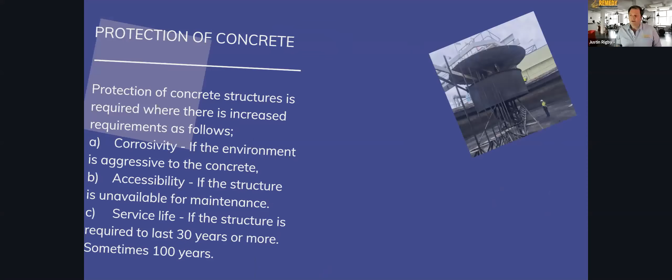So protection of concrete. Concrete on its own often survives quite well. When we're talking about protection of concrete, we're thinking about either applying a barrier on the outside, so waterproofing, protective coatings, or managing the corrosion of the reinforcing steel through corrosion inhibitors and cathodic protection. But not all concrete needs that, right? When we're talking about those strategies, we're looking at a high corrosivity zone. Maybe it's coastal, or maybe it's exposed to chemicals, or something that is not going to be accessed easily again. So when cracks develop or spalling occurs, you can't deal with it.

So instead, the designer should make sure that there's that higher level of protection to begin with. So there's less chance of cracking, less chance of spalling, or for an increased service life, whereby the structure's intended to last more than 30 years. If you want something to last 50 years, 100 years, you need to start looking at these additional layers of protection. So that's just a focus on where we're at in heavy industry, really.

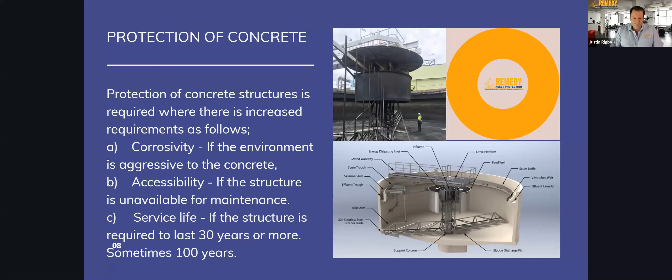And if I take you to some extreme examples, could you imagine trying to protect concrete in the nuclear industry? In a nuclear reactor, you have wastewater, and the whole reactor is encased in concrete. It needs to be resistant to radioactivity. That's the thing that wants to break down organic molecules. It also needs to be chemically resistant.

So if you own a nuclear reactor, if you want to sleep at night, you're going to make sure that thing's done right. You're going to have clear specifications. You're going to pre-qualify your contractors. When the work's taking place, you're going to make sure someone's there to inspect it. And you want all the documentation to make sure that there's a paper trail saying everything was done right. You're not going to wait for a defect to occur and rely on a warranty, right? You're going to get it right the first time.

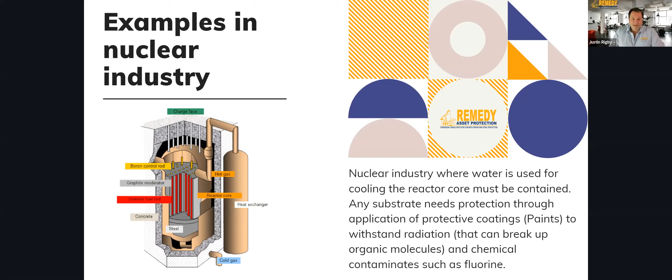Another example could be seen in the mining industry, for instance, with their wastewater. Their wastewater is contaminated with heavy metals and strong acidity. And perhaps in a tailings dam, they may have a clay base with a liner, but on the dam wall, it may be a concrete wall. So the concrete needs to be protected from the contents of the dam, from the aggressive environment. So again, linings and impregnations and mixtures and things like that need to be applied to protect that concrete.

Because we've seen around the world tailings dam failures where the dam wall breaks and it's flooded townships, it's wiped out townships. So these are the extreme examples whereby if you want to sleep at night, you've got to make sure you get everything right. And so that's where these durability lessons in heavy industries come from.

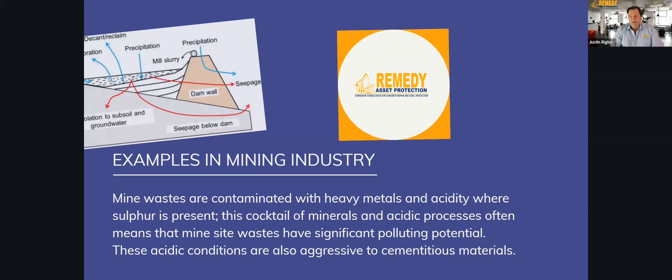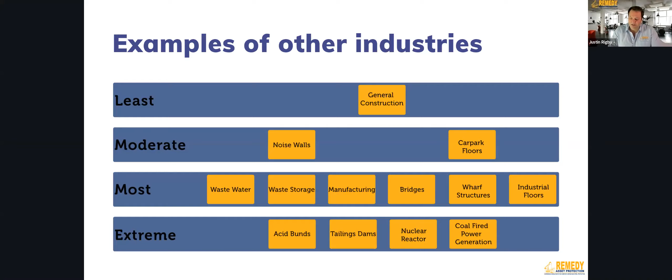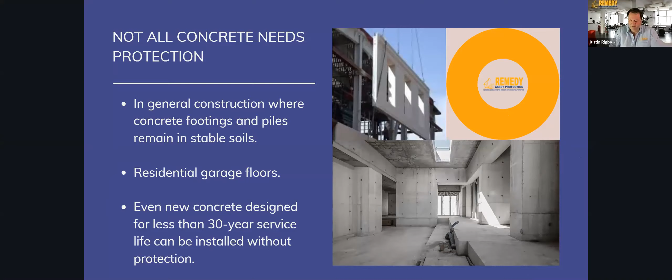So we know not all concrete needs protection. For example, here in the image, the prefab concrete panels that are being installed on a commercial building, they just need decoration. They don't need protection. The image below, my new mansion on the beach at Byron Bay, that doesn't need protection. It needs decoration. Anything that's designed for less than 30 years durability, concrete will stand up quite well unless it's a seriously aggressive environment.

But if we're bringing our focus from the heavy industry back towards civic infrastructure and even commercial construction, we're thinking about atmospheric exposure of concrete. So not the tailings dam, not the nuclear reactor, but more bridges and structures and wharves and piers and things like that. So in those structures, the major degradation mechanism is usually carbonation or salt ingress.

Now, carbonation is the process of concrete reacting with atmospheric carbon dioxide. The concrete starts at a high pH value, which is very alkaline, and then over a period of years and decades, it slowly loses its alkalinity. The pH drops, and when it drops down towards 9, somewhere around there, the steel is not passivating itself. The steel will protect itself in highly alkaline concrete. But when we lose that alkalinity, the steel loses its passivating layer. The concrete's fine. It loves it. It's the steel that doesn't like it, and it starts corroding. And that's one of the major issues we deal with.

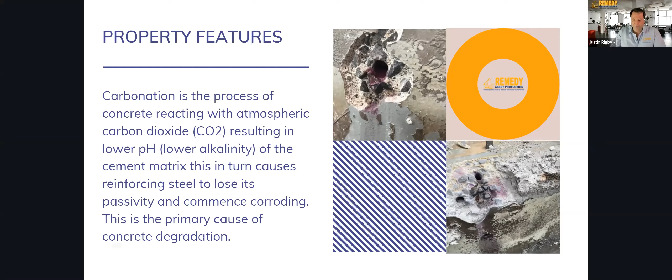Coupled with that is where salt can migrate through the concrete and find its way towards the steel. And whether the concrete's high pH or if it's carbonated, it doesn't matter. The salt will still interrupt that passivating layer and cause corrosion in alkaline concrete. If the salt migrates at the same speed as carbonation, it just means when they both get there, it's going to be very aggressive corrosion.

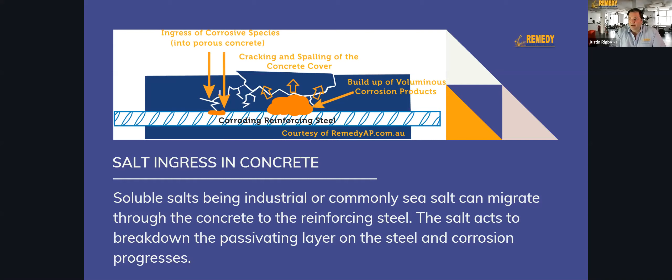So in dealing with carbonation and salt ingress, there's a range of different methods that can be employed to protect the concrete. And that includes, at the design phase, including concrete admixtures in the mix. Cathodic protection can be applied, but usually in the early years of a structure, if the designer puts some tags and probes in there, you don't need cathodic protection, but the tags and probes enable you to monitor corrosion of the steel. And then down the track, when you need to apply corrosion protection, you know when it's due, whether that be in 5 years, 10 years, or maybe 15 years, you can start applying cathodic protection to make the structure last longer.

Corrosion inhibitors can be applied within the admixture, but also later through migrating corrosion inhibitors. So it's a solution you put on the surface and it migrates through the concrete. And we can also use cementitious polymers to waterproof the surface. So they provide a barrier on the surface. So do our polymer coatings, such as epoxies and polyureas, provide a barrier to separate the contaminants from the concrete.

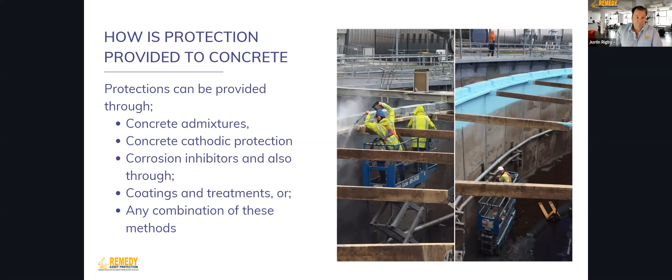So each of those strategies, when maybe just focusing on providing the barrier with the waterproofing or the polymer coatings, that can also be used to stop carbonation in concrete. It seals the surface off from the air.

So it is a relatively basic process, but it still benefits from quality control. The problem when we say something's basic or something's simple, all of a sudden nobody pays it any attention. And that's the problem. And an anti-carbonation coating is important. So even though it's relatively easy to apply, it's important. So it can benefit from external quality control. And it doesn't need to be expensive. It doesn't need to be a lot of work.

It just needs to be making sure that the surface preparation is done properly, that the primer is applied, and then the coating is applied to a proper thickness and has proper film forming characteristics to last 10, 20, 30 years. So just a couple of inspection steps on the inspection test plan helps make sure that that process is taken care of properly. Same as your migrating corrosion inhibitors, and it's like silane treatments.

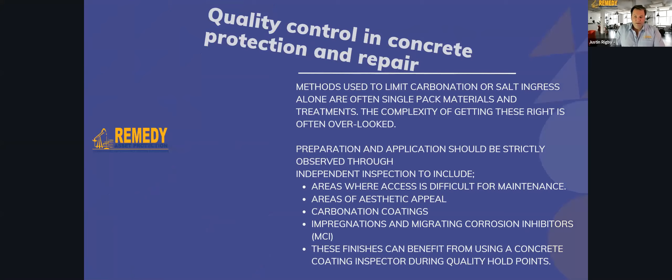Using these materials, it's all about the corrosion inhibitor migrating towards the steel. If you don't put enough stuff on, it doesn't get there, or there's not enough of it. So that needs, again, relatively simple process, but it's so important. It requires an external level of quality control. Just a couple of simple steps on the inspection test plan can take care of that.

Just a word on product data sheets, and I'll also talk about warranties, because these tend to be a couple of things that people trip up on. Product data sheets are written with good intentions of the manufacturers, but they're a generic document that try to describe the whole range of concrete protection, you know, from the residential decorative level through to commercial construction, right through to aggressive environments. And they're trying to communicate to that whole range of industry.

So the information that's in a product data sheet, consider it base level, and it's really something you need the experience of the product manufacturer to provide further information, and then also consultants to build specifications around that.

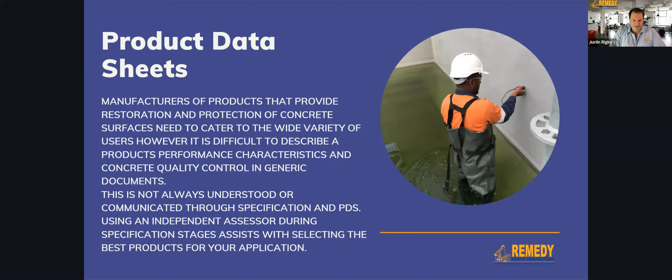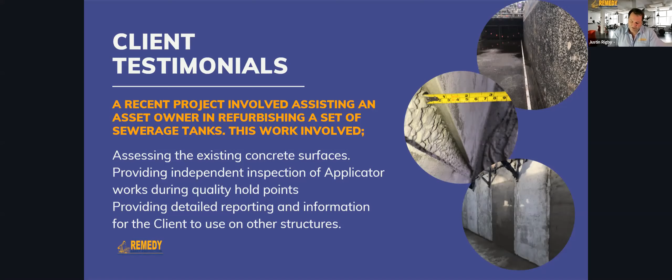And the image at the bottom is where, once they've completed all the panels, they've stitched them all up, and they've closed up that gap where the battens are. There is an image in a later slide that shows the finished wall surface after waterproofing, but I'll just focus on this example for a moment and describe that the benefits of quality control are obvious to the owner.

I mean, they get somebody that's experienced in concrete repair and coatings, that is focusing on their job, and somebody that's independent that can give an independent opinion of different things. So the purpose of this whole thing is to increase durability, right?

You don't want to keep going back into that tank, and you don't want the mortar to fall off to begin with, but even if it almost worked and it lasts 10 years instead of 20 years, that's still a problem. You don't want to go back there in 10 years. You want it to last as long as possible.

So by having independent quality control, that means that each step of the process is managed and doesn't pass until it meets the requirement. Another advantage, or an extended advantage of that, is that studies show 15 to 35% of the cost of corrosion can be saved through gaining better durability. And that doesn't mean new technologies or things that aren't invented yet. That means that with everything we have today, if we just do things better, you can save 15 to 35% of the cost of corrosion. You could probably consider that is a fair portion of a maintenance budget, really.

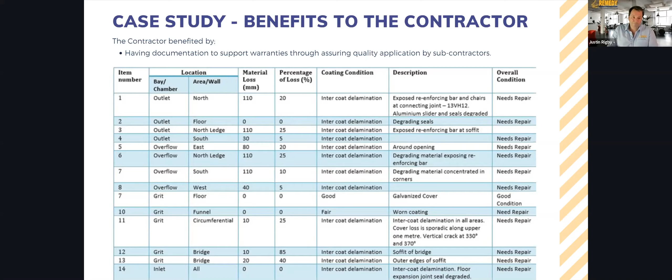For suppliers, material suppliers, when projects don't go so well and something fails, obviously the contractor gets it, but also the product gets blamed as well. People say, oh, well, that product fell off, but it's not always a materials problem. Sometimes it's an application problem. But if something goes wrong, everyone starts to smell a little bit. So for suppliers, knowing that there's an independent person there gives them more assurance that their products are being applied properly and that they're going to get great results.

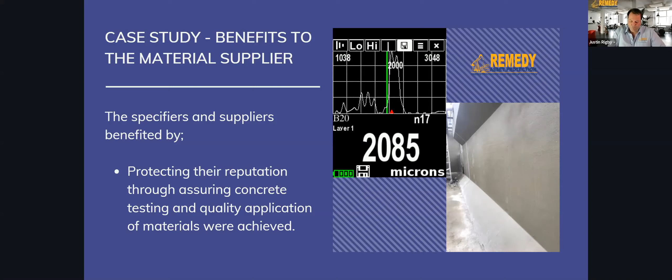For the applicator, the subcontractor, they also benefit. Quite often we go onto a new job and the applicator's like, oh, wow, what's this? These people are going to watch over my shoulder. They're going to check my work, and they're a little apprehensive. But within the first couple of days, every job we're on, the applicator soon realizes that we're of benefit to them. They've got somebody that's experienced on many different projects observing what they do. And the intention is that if something's going astray, it gets picked up early.

Applicators love it. They save time and money; when they identify issues late, that's when they have real cost problems. Then also, knowing that somebody is documenting and recording the project, for a project that's going well, the report is a glowing endorsement of that job. So that also helps protect them from warranty claims. Then there's some images of some different jobs we're on, witnessing mortar application, as well as testing concrete and concrete coatings.

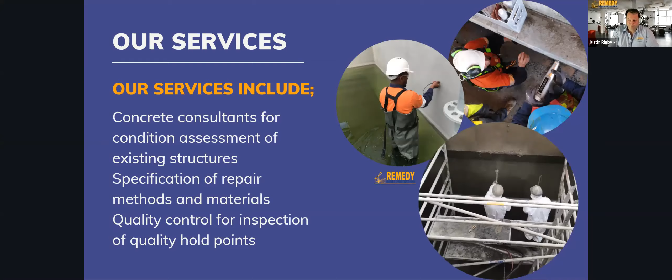And I'd just like to leave you with a last few thoughts on how to succeed on concrete jobs, whether it's protection or repair: don't rely on warranties. If you're a project manager and you need to claim on a warranty, it means you didn't manage quality control properly, and often you'll never get back to fix it right. By that stage, the asset's already been put into service. Maybe they're not going to shut the asset down and give you proper access. So you need to use secondary repair methods that are always a compromise on the original level of quality.

You may have disputes where the contractor says, well, it's not my fault, it's the material's fault, or the material guy says it's not their fault, something else went wrong. So maybe you can't claim on your warranty. Nobody fixes it. So don't rely on warranties. Manage the quality control early, and use a couple of these key strategies throughout the project, and you're going to have the job you need.

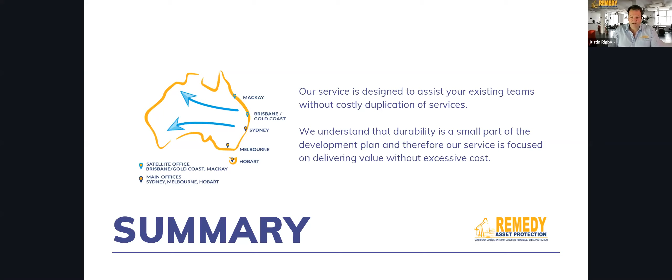Kieran: Thanks, Justin. Yeah, we've had a couple of questions come in during the talk. One of the earlier ones was, when we consider mass concrete is a highly durable product, if we think about historical structures and Roman structures being built 2,000 years old. If we can get rid of the steel inside the concrete, it'll probably make everyone's life a little bit easier. So the question was about, what's been your experience with the take up of polymer or fibre reinforcing as a solution in the concrete? And have you seen much of it in the industry?

Yeah, look, to be honest, I haven't had much experience with it. I've seen a couple of technical presentations from other people about it. So I can't really speak to that to a great deal. I won't waste time. Thank you. Have you seen much uptake in the work you've looked at in the newer structures? No, I haven't. The focus is what I've seen. The focus is on heavy steel, lots of concrete, and then protect the surface. All right.